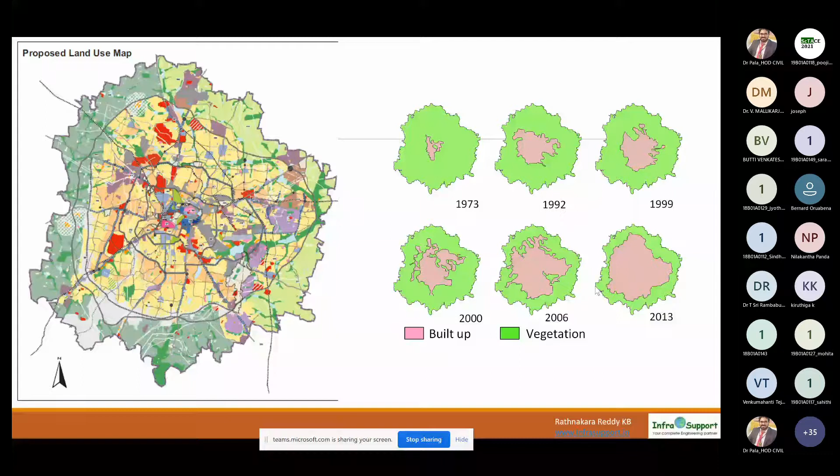And I showed this slide to show a typical Bangalore planning we did from 1973 till 2013. Every 10-15 years we revise the planning. The object of showing this is that the cities are growing very rapidly. So in 40-50 years, a small town has become a very big city. The point is, if you don't plan for say 50 years or 100 years, we'll end up having the chaos and mess we created in most of our cities in the country.

So then I said how it can be addressed. It can be addressed by four key important aspects: planning, design, construction, and maintenance. So what we miss out in most of our urban roads is planning and design, because none of these cities have ever been planned. They only grew into cities from a small village to a bigger village, to a town, then a bigger town, and then a city. Since we never had planning, the design also was not taken care of, and we only did some construction and then poor maintenance.

So in the planning section, not only the road, we have to consider planning for future modes of transportation, like if a metro or monorail is coming, and all the utilities required to cater for the next 50 or 100 years for the development that comes across these roads.

So future traffic estimation is important, and integrating information technology, like smart street lighting, automatic signals, and now incident management systems. Suppose an accident happens, the control center gets a message. And now intelligent public transport systems, where people standing at the bus stop will know at what time the bus is coming. These are all aspects that must go into the planning, which we normally don't do.

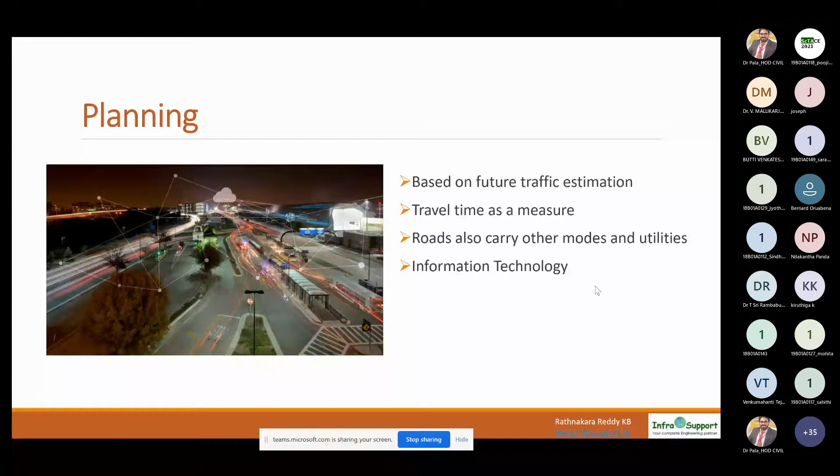I also mentioned that transportation planning, any urban transportation and road planning, must start from your doorstep. The key element, the basic element of the whole urban planning, is the citizen. The moment somebody walks out of his gate, he must have a choice. Either he can walk, take a bicycle, catch public transport like a bus or a metro, or use his personal vehicle, a four-wheeler. He must have all the choices. Only then do we call it a robust public transportation system and a robust urban planning.

Without this, we are doing only ad hoc planning. We are doing all these metro constructions across all the cities, but we are only building metros from one point to another point, without giving importance to first mile connectivity and last mile connectivity. If you don't give first mile and last mile connectivity, people don't use public transportation.

There must be a choice to the citizen always to choose the mode of transportation he wants to choose.

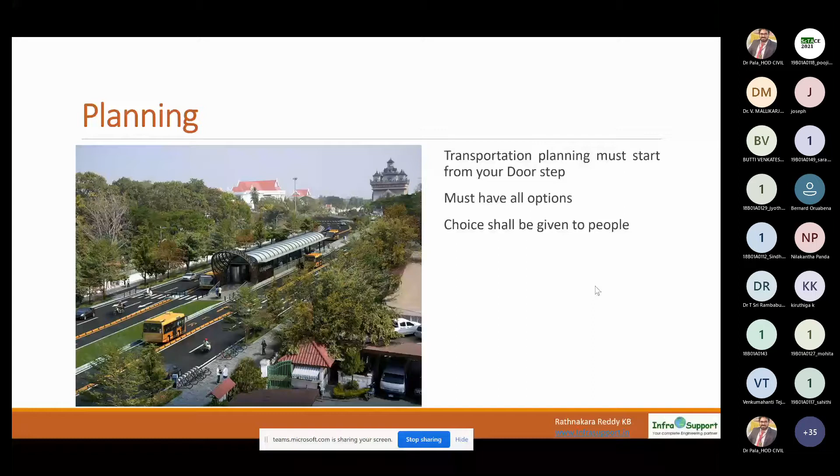So what is missing in design all this time is that, as I already mentioned, urban road designs are very complex compared to rural highways. Designing a 4-lane or 6-lane highway is much, much easier. I have done that, but not the urban roads.

If you want to design 1 kilometer of urban road, it takes a lot of time and effort, because not only carriageway, median, or footpath, you must see how the footpath is physically handicapped friendly, what kind of utilities must go below the footpath, what is the size of the sewerage line, water supply line, OFC duct, electricity duct, and how the stormwater drain works, where the water will go, where the culvert should come. These are very, very complex, and we are not designing only for today, but to take care for the next 50 years.

And suddenly, one fine day the government will say, I'm going to pass metro transport on this road, then you must have enough space on the median. So all these aspects have to go into the design.

Another important aspect is pavement. Pavement is the biggest investment, the biggest money goes into the pavement, and then pavement requires maintenance. Now most municipalities and corporations are fed up with spending money on bituminous roads, so they have started moving into concrete roads, which we call white topping, because white topping gives a lifespan of about 25-30 years, so it's a one-time investment with no maintenance.

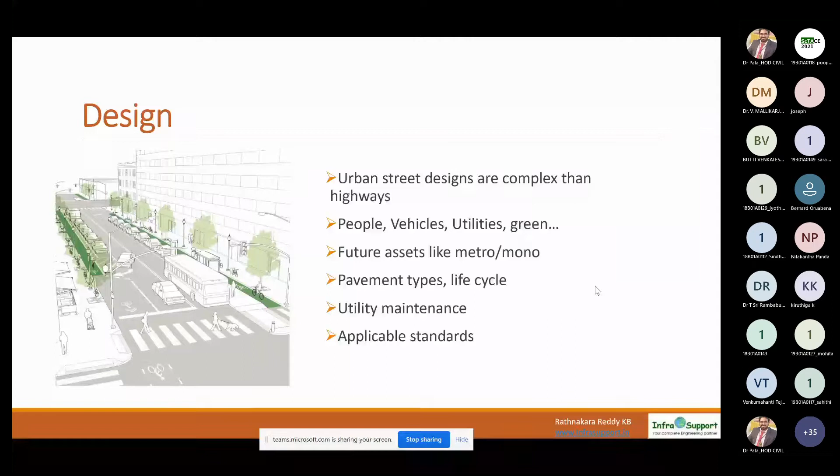Then another aspect is utility maintenance. You have to coordinate with many utility departments and make sure your utilities are always maintainable and that you follow proper design standards.

This image is about some of the work we did on Tendersure roads in Bangalore about 6 years back. When we did these Tendersure road designs, the whole effort went into planning to make these roads sustainable for 25 years. There was a sign-off between all the utility agencies saying we are not going to dig this road for the next 25 years.

To do that, you tell me what kind of infrastructure you want, what size of pipe, what size of OFC duct you want - so everything has been taken care of. The cost went up by nearly 5 to 6 times. At that time, when the construction cost of a road was about 1 to 2 crores per kilometer, it became like 10 to 12 crores per kilometer.

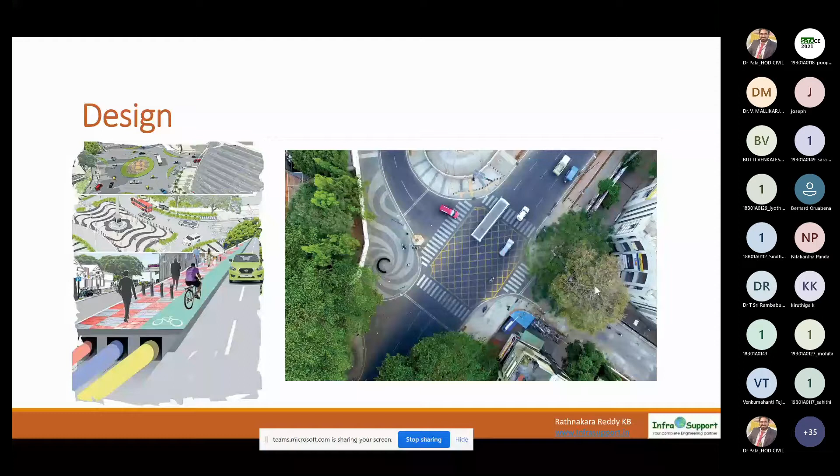So there are a lot of challenges also. There are people who are up against this huge cost saying some scam is happening. And then you have to convince the political masters and government bureaucrats that what we're doing is the best, because government always thinks very conservatively about spending more money since they don't know what happens. During construction too, if you see the last image, the number of utilities, pipes, ducts, and cables was a mess. Unless we tackle this in urban roads, we can never get sustainable roads.

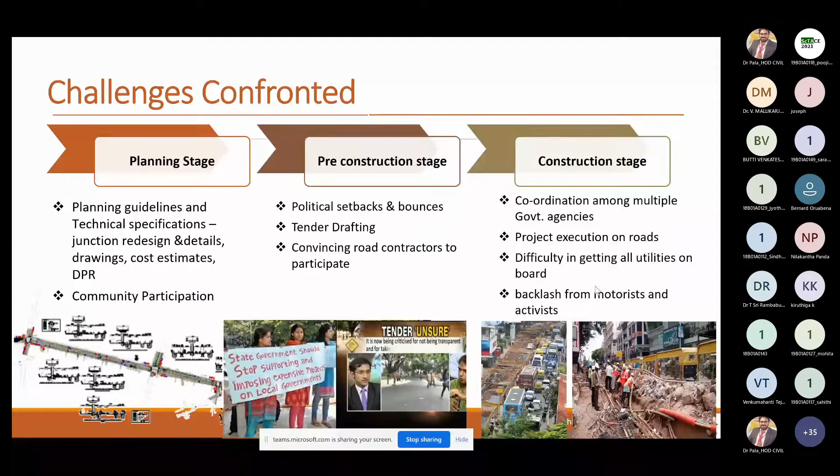After planning and design, construction is key. Now the problem is we treat urban road construction the same as rural road construction. It cannot be, because in urban roads there is always life - there's business happening, commercial activities, people moving from one part to another, and they will say only this road exists, there is no other alternative road.

So unless we come out with fast track construction methodologies - like using precast drains, modular footpaths, going for precast concrete pavement itself, and planning 24/7 on a shift basis - we will not be able to complete the construction at the fastest time possible. If you don't do construction at the fastest time possible, there are huge losses the country has to bear.

The losses occur through loss of business, increase in travel times, and delay in productivity. All these are costs, but normally we don't attribute this cost, we only mention the number of months of delay. These are all costs involved in delay in construction.

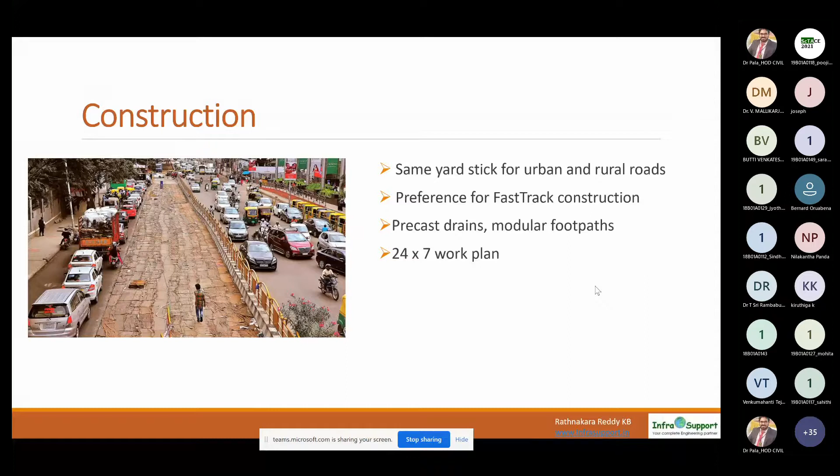So fast track construction is key, and constructing as per standards is crucial. We have IRC standards and MORTH guidelines, but most of the time we mess these up in urban areas because of constraints, like not being able to close traffic. So we do some ad hoc construction and end up with poor quality.

Last but not least is maintenance. Unfortunately, in India, all of us lack in maintenance. I always say maintenance is not in our genes. We don't even maintain our homes properly. We think once we invest enough money to construct a big palatial house for 5 crores, we don't keep budget for maintenance.

But when it comes to public assets like roads, they require maintenance on a day-to-day basis. There are routine maintenances, periodic maintenance, and rehabilitations - everything comes in the life cycle of a road. So we must plan maintenance along with construction itself.

There must be maintenance guidelines saying what routine maintenance we do, what periodic maintenance we do, and the budgets for it. Unfortunately, the way government system works, they will always grant budget for capital works, but they don't grant for maintenance works. For them, maintenance is something not required.

So government thinks, if there is 100 crores, I can build 2 flyovers or about 10 kilometers of roads and tell people I've built infrastructure. But if you put the same 100 crores into maintenance of existing road assets, nobody will know. So government has their drawbacks on why they don't put budget for maintenance. But it's time now that there shall be a separate maintenance budget and coordination in maintenance.

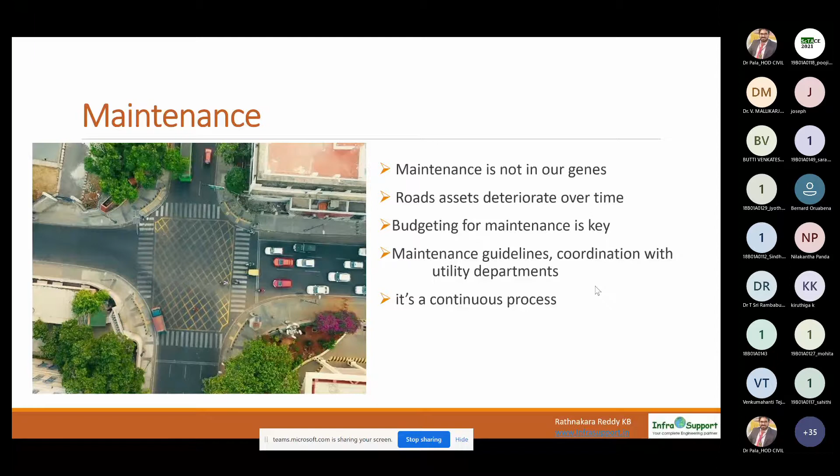If you look at some studies - this was a 5 years back study - it says India suffers a huge loss of $21.3 billion annually on account of delays in construction and also fuel consumption. This is only a figure for delay calculation. But if you add all the costs from loss of businesses, closure of businesses, travel time, productivity loss, and frequent maintenance, these figures will go beyond $100 billion.

So the key is, if we are to keep sustainable roads in our urban areas, planning, design, construction, and maintenance are all key. If we don't do this, we'll continue to have poor infrastructure, and we continue to lose money day on and day on.

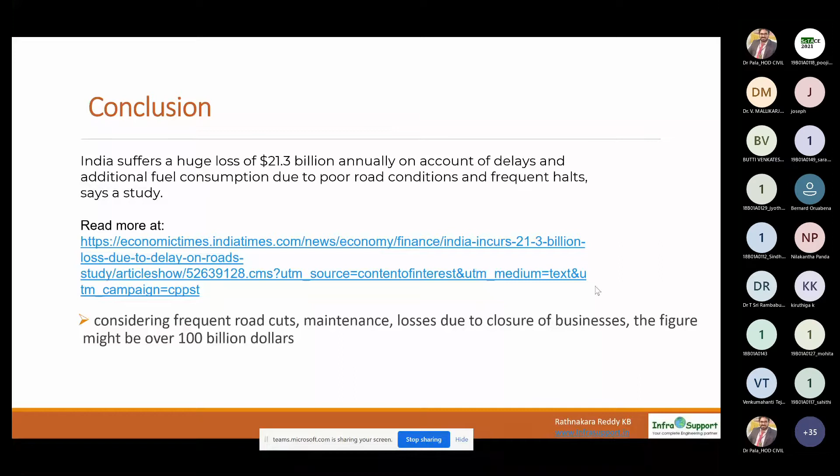So with that, I'll conclude my talk on urban roads. I'm always a big fan of R.K. Laxman. Even 50-60 years back, he made enough cartoons showcasing the days to come - what will be the problem of transportation, parking, vehicles, and all. Thank you all.

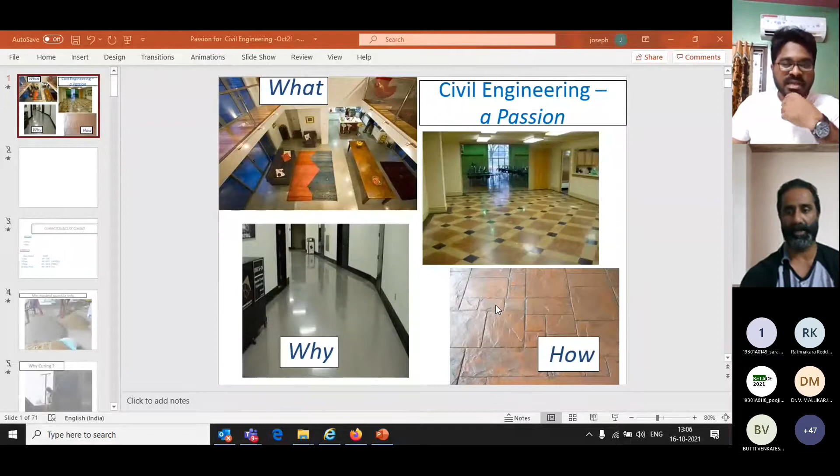Let me attempt sharing a slide. I think I will also need to browse my computer. There is on top left right corner, you could see arrow mark up. Yeah, I've come to that, and then screen is there, window is there. Maybe if you open the PPT, you can directly screen. Yeah, I've opened the PPT. Fine, sir. You can keep it in full mode, sir. Full mode. Absolutely fine.

Meanwhile, I'll just take you through something on what I would like to talk to you. Basically, for students, you have to know the what, why, and how of everything in your curriculum. This will actually help you do things right when you are at the field.

So you have time to go through various theories, through reading, watching certain videos, or watching certain programs, or watching certain applications at site. And then, of course, doing it yourself is also a part to understand much better. Finally, I would also like to say that there is something called passion on everything. So in case you can identify it yourself, probably by the end of the course, that you're passionate in some field, try to master that.

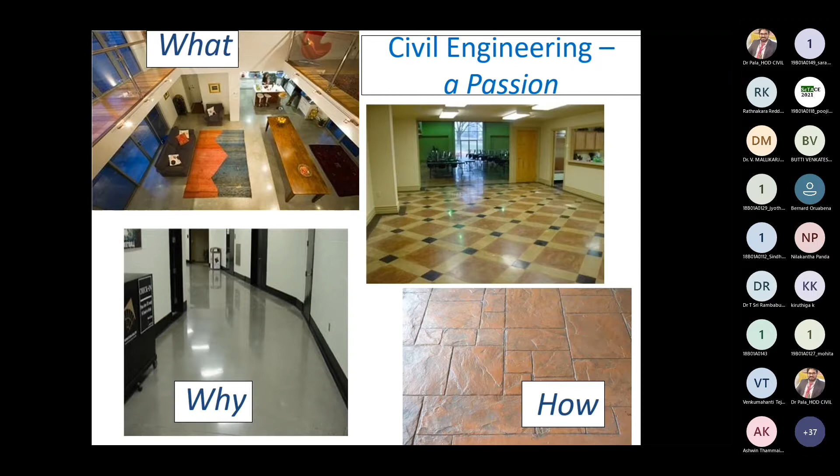Is my slide moving? Moving, sir. Please proceed.

Of course, you all know that we have a wonderful set of codes prepared to guide us through every small little thing we do in engineering. So when we come into civil engineering, there are codes giving very precise guidelines to make us safe across all parts of construction, but it would only help if you have gone through the code at least once.

Now, this is the time you keep referring to small parts of the code, but I would give an advice that please go through codes, at least whatever you have been referring through, please read the entire code. These codes are very minimalistic, but give very powerful information. And of course, probably today, if you read it, the next 5 or 6 years you encounter some issue, you may remember there is something mentioned in the code and you can come back to it.

Only then you can come back. But if you have not referred to or read the code, these codes may not be remembered during a crisis or a real need. So please make it a point that you go into codes in great detail.

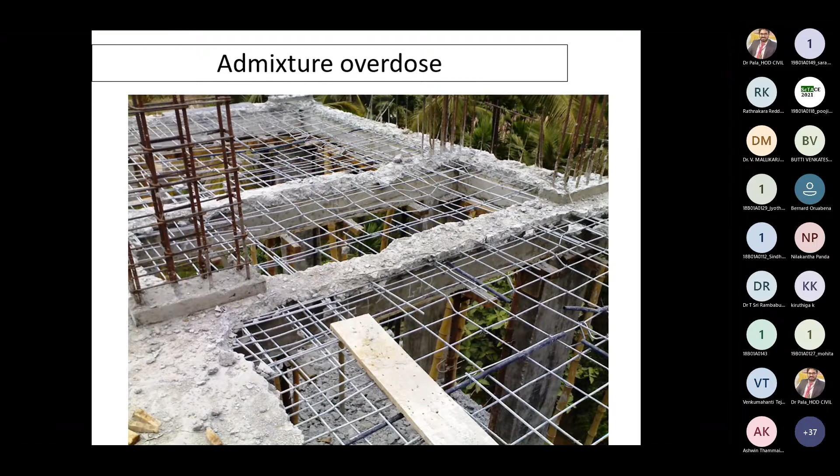Knowing about materials is definitely very, very important. You cannot take things for granted, and now is a very powerful era with a lot of marketing involved in every product. You have been seeing day in and day out how various products are being positively or negatively marketed. So it is your responsibility to understand the product before actual use, to avoid any sorts of issues.

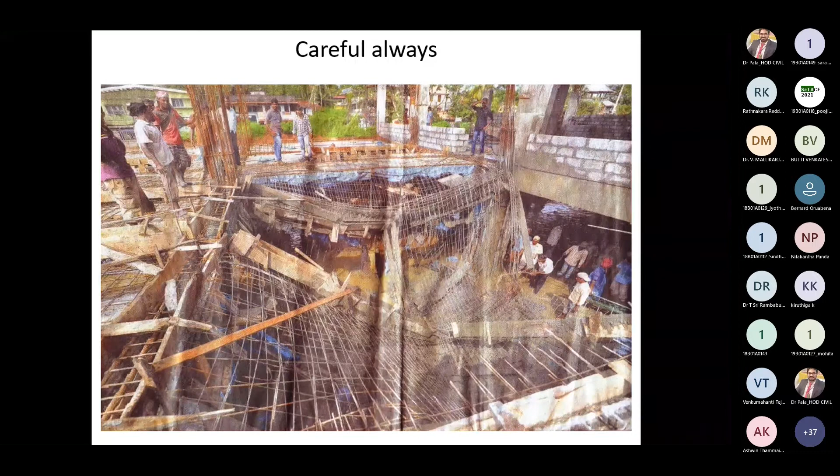Safety. In construction, this is the prime most important factor. There are very large construction sites where work comes to a dead stop because of safety concerns. Of course, we all value life. Every individual is worth a million. So safety should never be forgotten at whichever cost. Your own safety and your team's safety is also very important.

And it goes without saying that attitude is definitely needed in youngsters. This college is an all-women college, and there is a lot of good news for women in industry. In September, a couple of you must have noticed that there was an all-women workforce at the Ola Future Factory, which took its first batch in September. So women are also getting into a lot of industries, including civil engineering. Men and women definitely have equal opportunities.

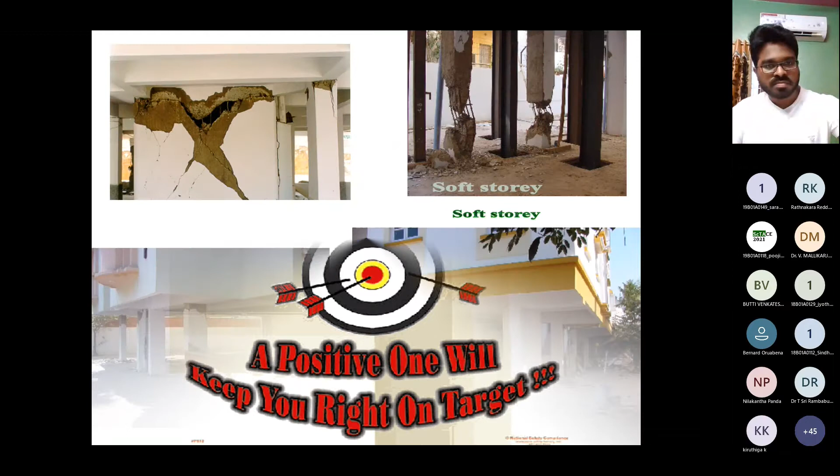So knowing very specifically what you learn from theoretical aspects, precisely apply it in practice. There is some very old saying that the bookish worm does not eat, or the bookish cow does not eat grass — this is not precisely true, in my view. Whatever you learn in books is the culmination of hundreds of years of information put into a small piece of information. It becomes easy to understand things. Applying that more relevantly will only solve construction problems, which is very, very essential.

In the current days also, there are so many problems happening. If you have recently noticed, there are a lot of building collapses. It happens because of wrong engineering. There's absolutely no other explanation; it only happens because of wrong engineering. Every element is important. If you compare it to a human body, you cannot say that the heart is more important than the lungs or the liver, or that the eyes are not so important while the ears are important. No, in the same way, for a building, every element has its very crucial role.

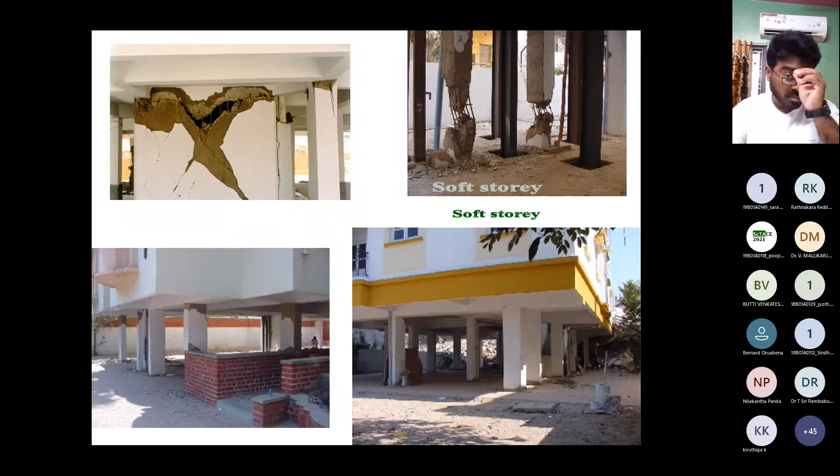Now, of course, you've all heard of earthquakes happening, and a small change in the attitude at construction sites could have saved a couple of buildings, is what a couple of good engineers commented. So these are all few learning lessons for us. At least now you have a great opportunity, with a lot of lessons coming live as videos and pictures, to understand more easily than probably about 20 or 30 years back. So it is definitely

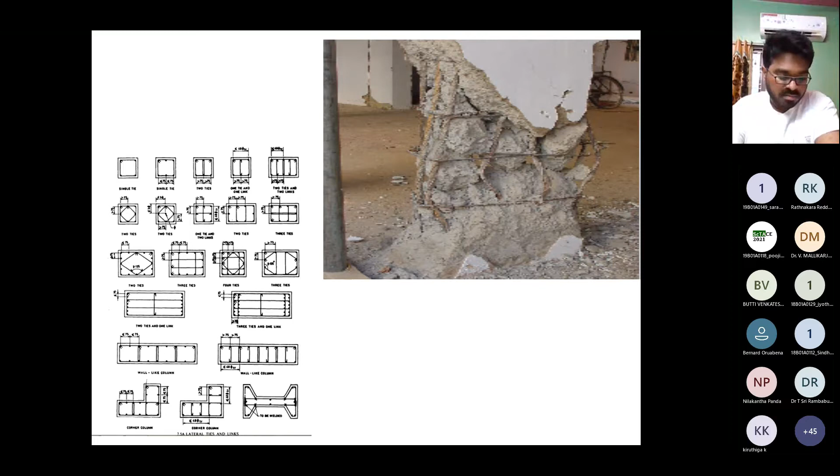easier to grasp engineering and have that impulse within you to do things the right way. Simple, very simple techniques — the importance of lateral ties is actually taught in colleges quite often, but you will actually feel it when such problems happen. So a small extra care, even in casting a small column, could save a large building. So the importance of lateral ties, the positioning of the bars with respect to the bending moment and shear force — if you want to continue with civil engineering, and if you have not understood bending moment and shear force clearly, there's still time to brush it up and get it into your nerves so you never forget it in your life.

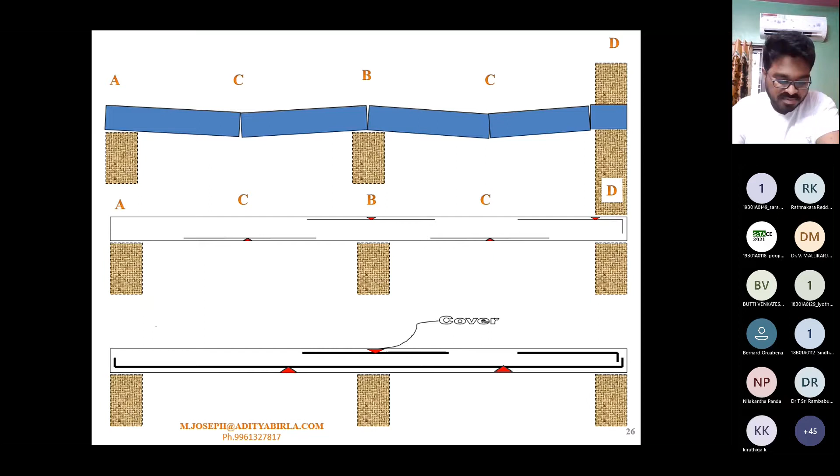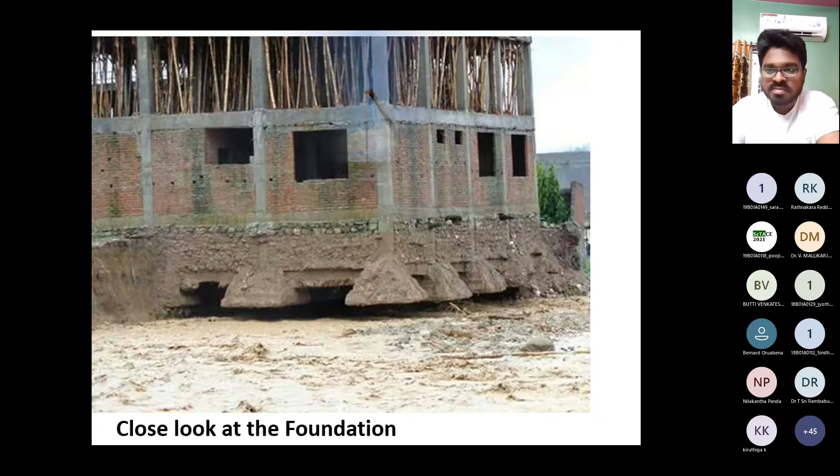How it actually behaves can be understood now with a lot of examples across the world. Technology is changing, and we have to adapt to the best. If you buy a car today, you won't just think diesel or petrol - you'll consider the latest option of battery powered or fuel powered. Likewise, every customer or industry wants the latest option. You cannot say olden times people did this, so we'll try that. No, we need to go to the moon.

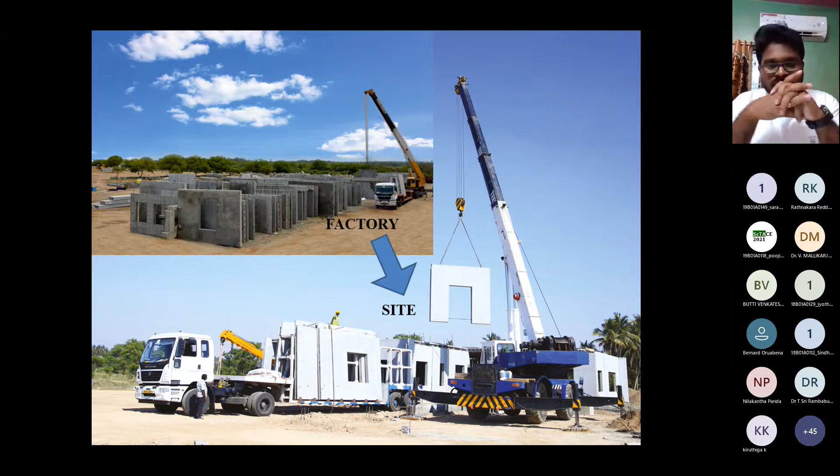If you don't adopt the latest technique, somebody else will. So adopt, understand it, be with the latest technique, and try to adopt as opportunities arise. Precast buildings are coming up, a lot of new technologies are coming up, faster technologies are coming up. You cannot adopt it everywhere, but appropriately you should be ready to provide a solution. For that you need at least a base knowledge of whatever is being done.

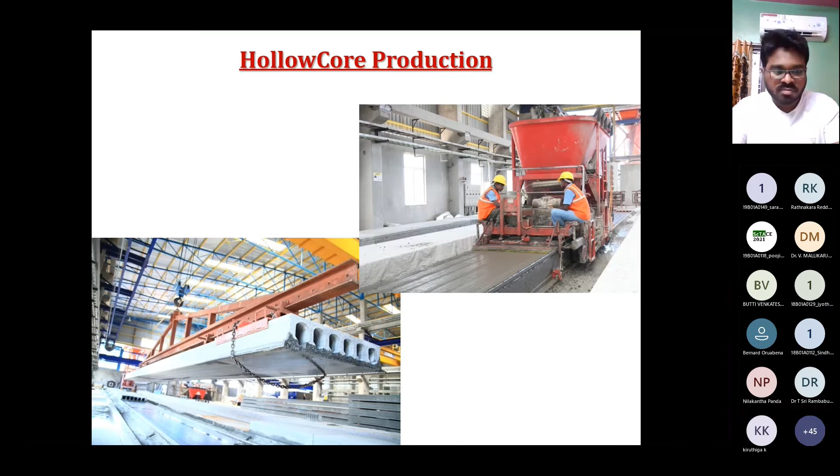For students especially, I would urge you to utilize your project work or industrial visits with a purpose. Don't just feel that for engineering you need good marks rather than good knowledge. Try to visit a couple of sites with a feel that you need to grasp something from there, including your projects. Don't just do it for the sake of completion. You may get a nice opportunity to innovate something which has never been done, if you do it with a purpose.

But if you just want to complete it, you may take something previously done and attempt only a small modification. Now, I don't know if my voice is clear.

Steel buildings and composites - you cannot imagine saying I will not use steel buildings, I will do only concrete, or I will do only steel and not touch concrete. Even a Mercedes has parts made with plastic, steel, or carbon fiber - it's a composite. You need to adopt wherever required, whatever is required, and optimize its use.

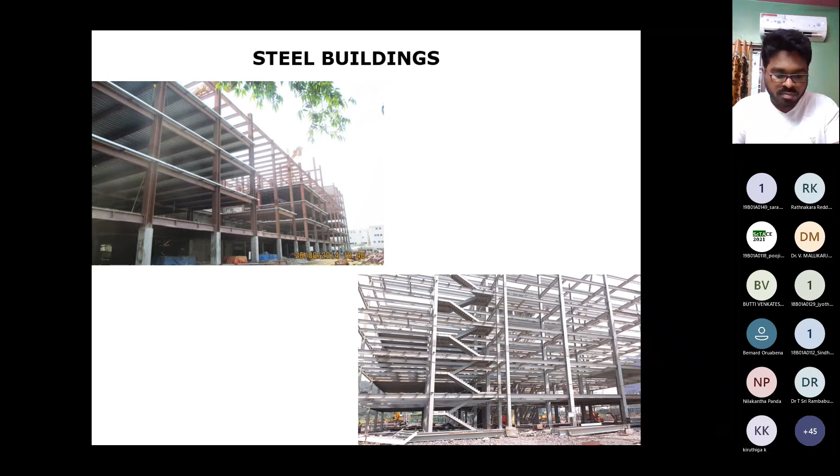This brings me back to your conference theme of sustainability. Sustainability is to construct with the least harm to the atmosphere, but that doesn't always mean just materials - sustainability also has a time element. Time is the most valuable resource on Earth. You cannot do something very slow in the process and say you've saved so much material. Time is also an essential material to be considered under sustainability, along with reusability of materials, and beauty is no compromise anywhere.

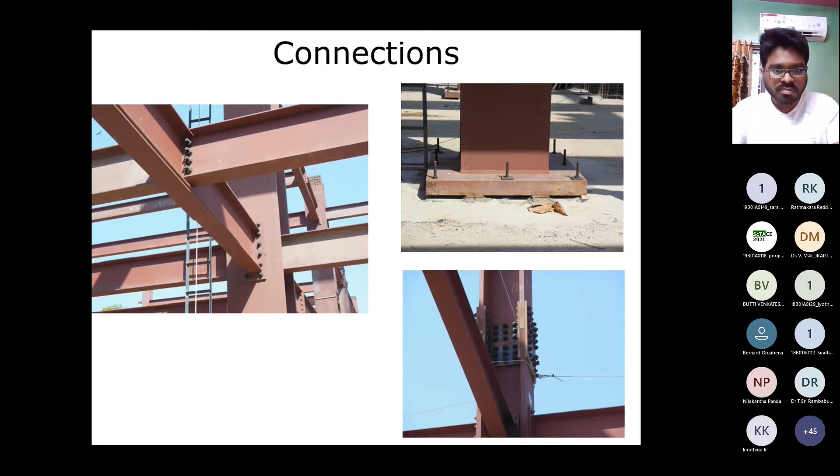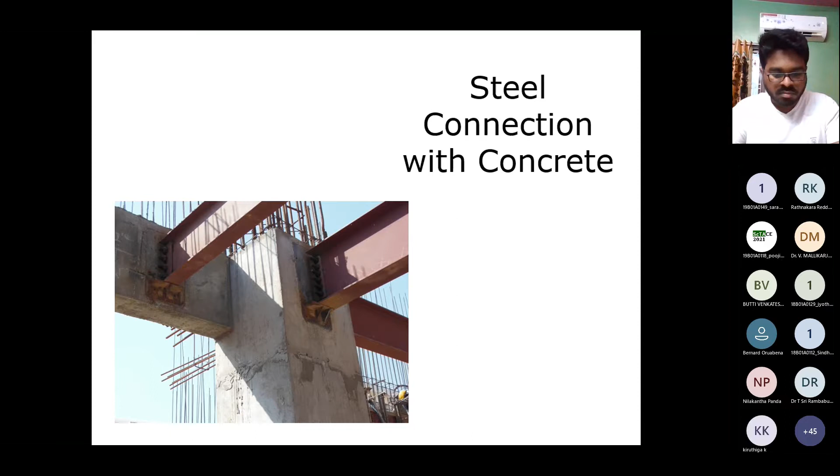When you learn something at college regarding steel buildings, don't just learn for the sake of learning. Try to understand its application - every bolt or connection needs to be felt and learned, so that when the application comes, you are ready for it. For composites, have a composite understanding, and also understand various softwares which make your process much easier and faster.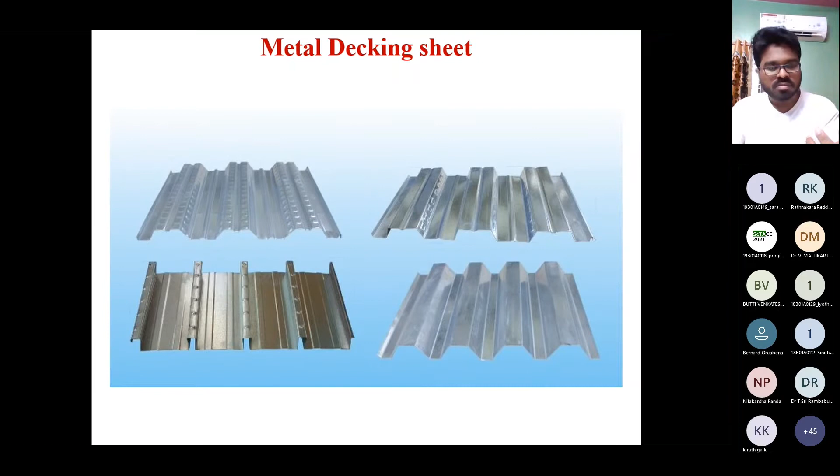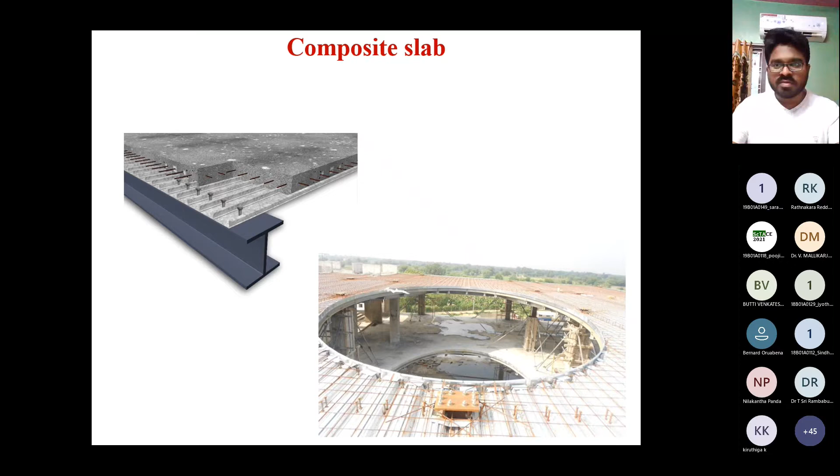With decking slabs, quite easy and fast construction is possible. I hope across India these technologies are available - I'm not showing anything futuristic, just things currently in application. A good example is the Cochin Metro, where decking slabs were used to connect the girders. It is a left-in form, so construction is faster, and it's interesting - it needs to be understood.

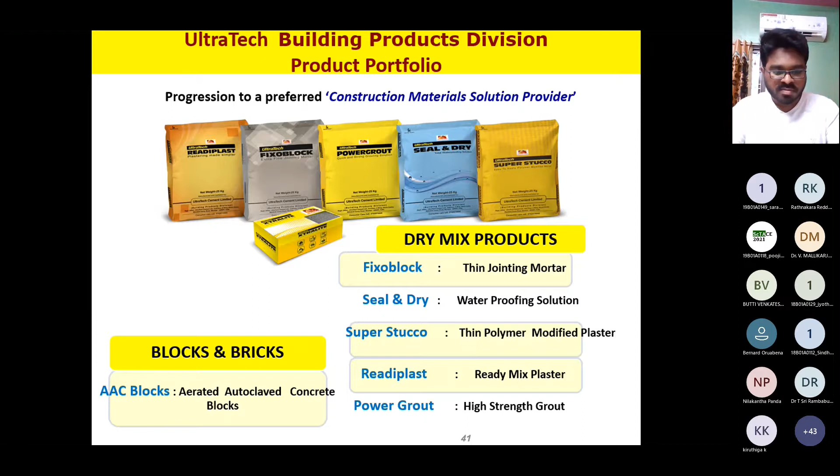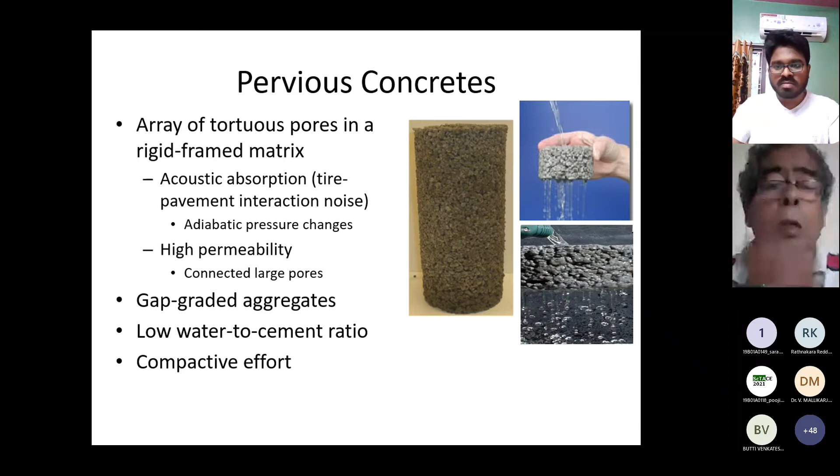And of course, you have a lot of new materials. Anything in the international construction arena is currently available in India. Lightweight blocks and all that are available, but before use, you may not use it if you have not understood it. This is the problem in current engineering also. Because I don't understand certain things, I will postpone and say, not for this project, I will try for the next project. This happens if you lack information. So try to gain information. These are not complicated, they're all simple things to understand, only need a little bit of focus.

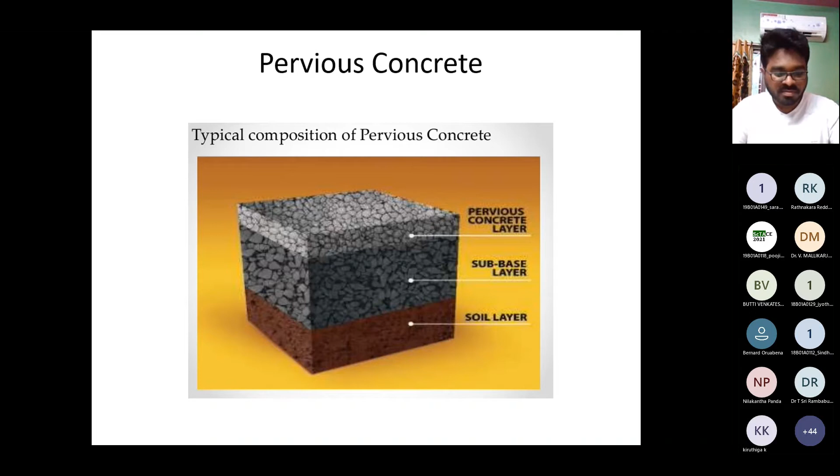You've all been hearing about pervious concrete. Somebody was asking whether pervious concrete will as such absorb and take off water. It needs to just let away water, and it needs to have a collection chamber separately. It is only pervious, it doesn't drink water. So how do you design that, and what are the necessities, these are all very interesting facts.

Build something with a sense of engineering and beauty to make it sustainable. Not just, you have to save cost, you build something, use it, and however dead it looks, let it remain, I have saved a lot of cost. No, it should have an element of beauty to gel with nature.

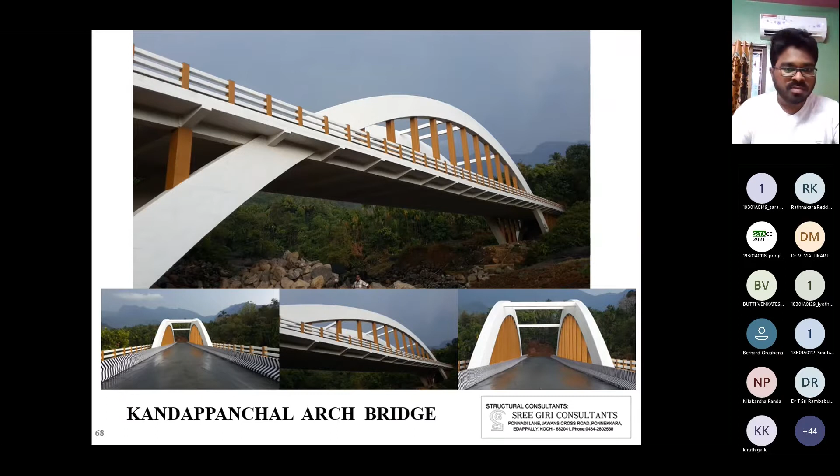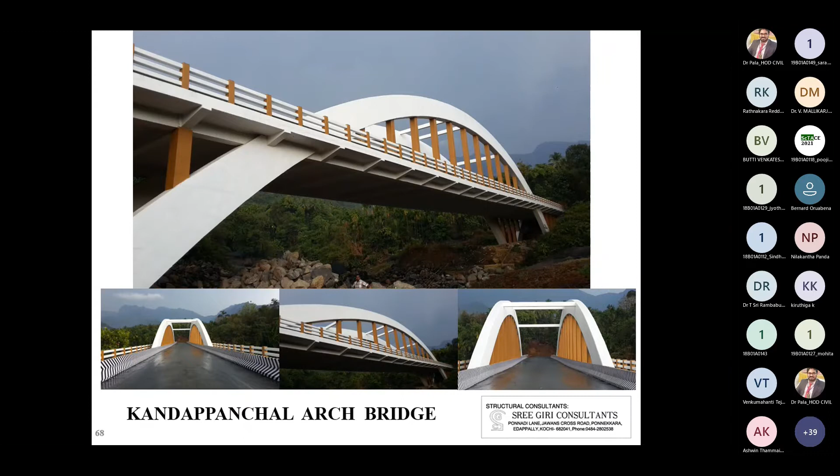And I'm sad to say that Professor Aravindan, head of, he was a professor at IIT, he was heading Sree Giri Consultants, is no more. But my remembrance for such great designs on this occasion.

And of course, the world will not stop thinking. You need to innovate. Engineering today will never be the same tomorrow. So please innovate, have the guts. You may go wrong slightly here and there, but...

So be a responsible engineer. Whatever we do, why do we select concrete? Because concrete can be made to last at least 100 years comfortably, not like other metals which need painting and maintenance often, or wood which also needs maintenance. Concrete was, is, and will be a very durable material if you do it right the first time.

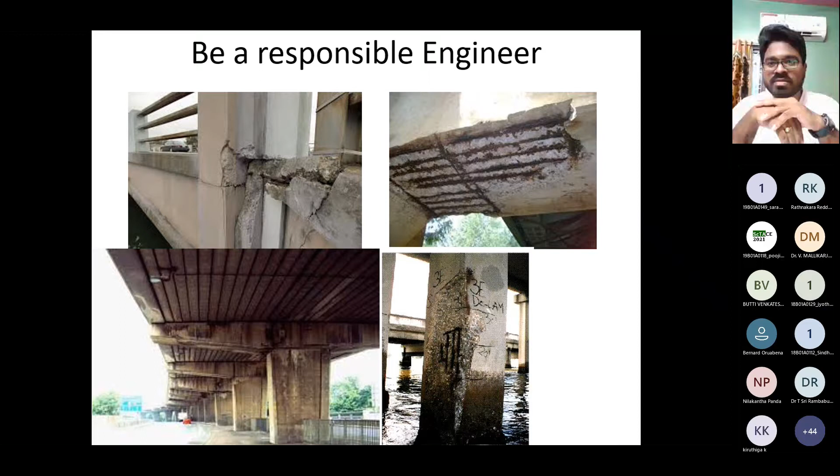So be a responsible engineer. As a member of Indian Concrete Institute, I will reiterate that concrete can be made to last at least 100 years much easily. It's not so tough, just have that belief within yourself. It can be made. So thank you so much.